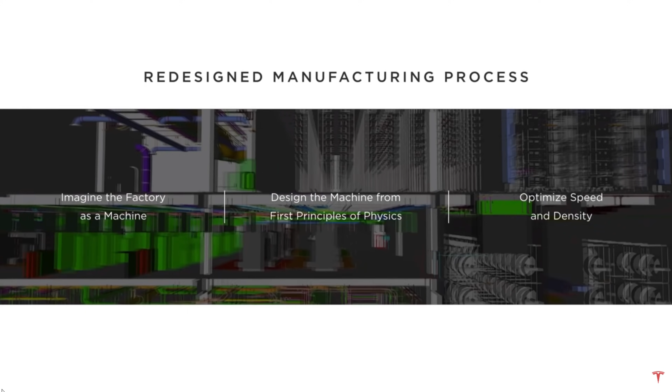Today, we'll discuss the battery production line that will help propel Tesla to 2 terawatt hours of battery production in the next 10 years.

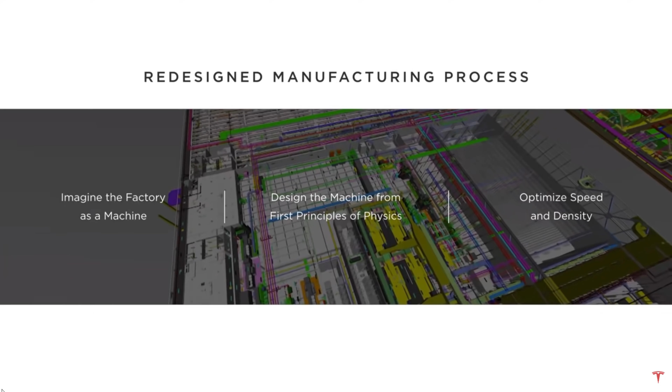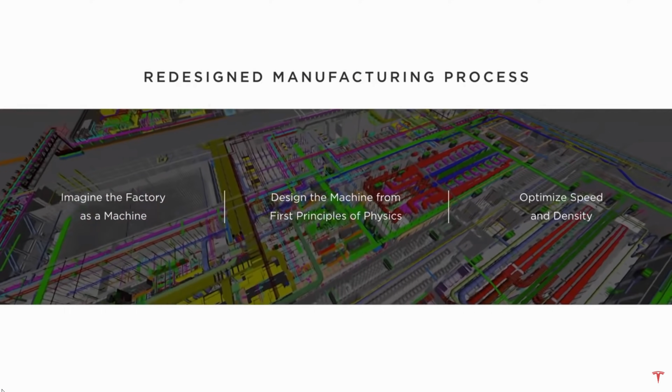To kick off, let's cover why I think 2 terawatt hours is a good target for 2030. Elon has stated that Tesla will grow by 50% a year. He's also stated that they are targeting 1 to 2 terawatt hours per year of production, but he didn't say by when. At the end of 2019, Tesla was producing and consuming batteries at an annualized rate of around 26 gigawatt hours. If Tesla grows 50% a year for the next 10 years, that puts them at 2 terawatt hours per year at year ending 2030. This gels with both of Elon's statements.

Let's put 2 terawatt hours of batteries into perspective. I've calculated a reasonable pack size for each vehicle type in the US, such as sedan, truck, and semi. I then referenced that against the market share of each of those vehicles and came up with a 90 kilowatt hour average pack size. This means that with 2 terawatt hours of battery production, Tesla could manufacture 22 million vehicles a year. That begs the question, how many vehicles are produced a year?

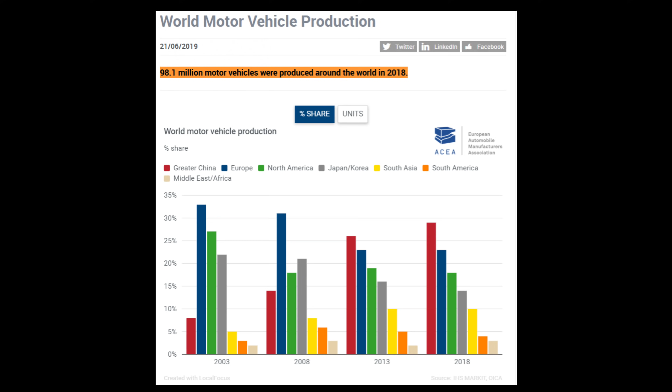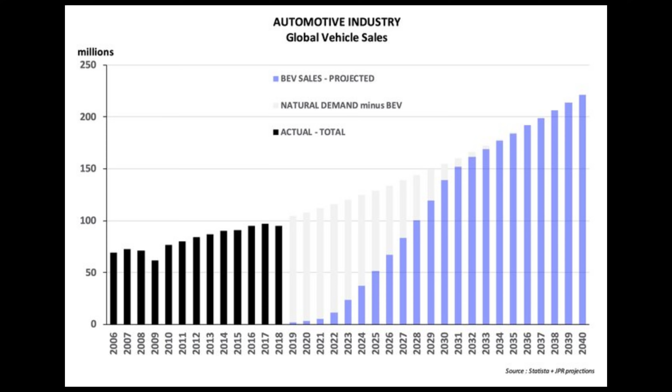There are currently 100 million vehicles produced globally each year, and that's expected to grow 2% a year throughout the 2020s. By 2030, that would mean close to 122 million vehicles a year, and based on other estimates I've seen, that could be grossly undershooting it. Using our 90 kilowatt hour average pack size from earlier, 122 million vehicles would consume 11 terawatt hours of batteries per year.

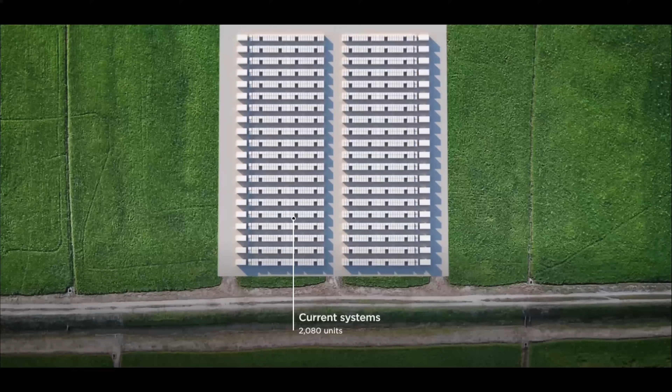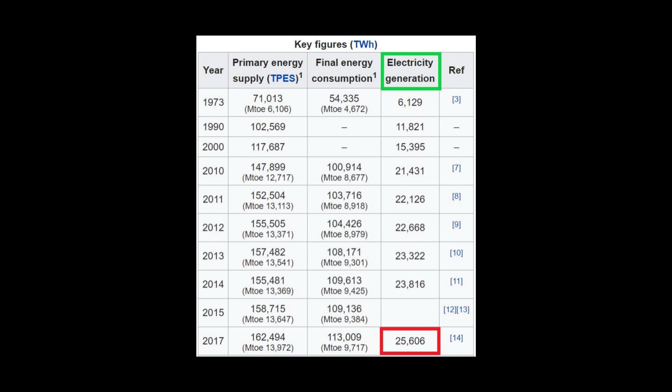However, let's take a look at potential global total addressable market. Globally, more than 25,600 terawatt hours of electricity are generated each year. By 2030, assuming a 3% growth rate each year, that would mean 35,000 terawatt hours per year.

How much energy storage backup would that need? It completely depends on the energy generation mix of each country or area. But I'd say 2 hours of storage would provide a nice buffer. I've seen other estimates up to 6 hours, but we'll play on the conservative side. That little 2-hour energy buffer for the world's 35,000 terawatt hour yearly usage would mean 8 terawatt hours of energy storage.

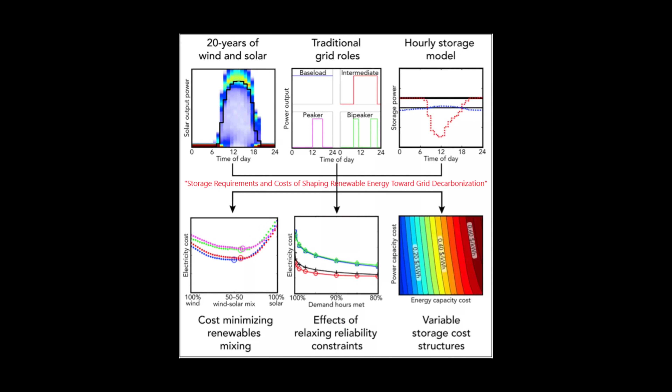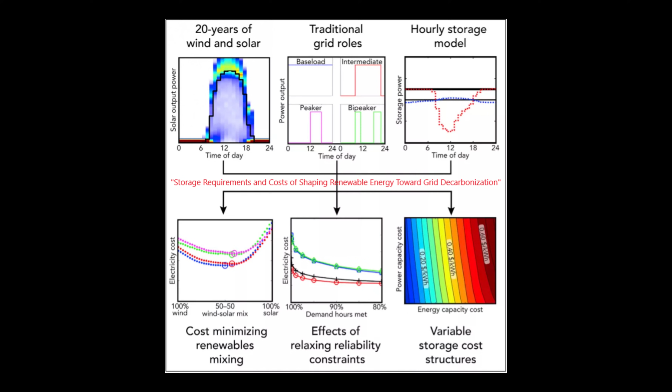That buffer would need to grow over time as the world shifts towards greater dependence on renewable energy, such as wind and solar, that produce energy supply fluctuations. This would quickly push the amount of energy storage needed past 8 terawatt hours, and this would make Tesla's energy business bigger than its electric vehicle business, just as Elon stated.

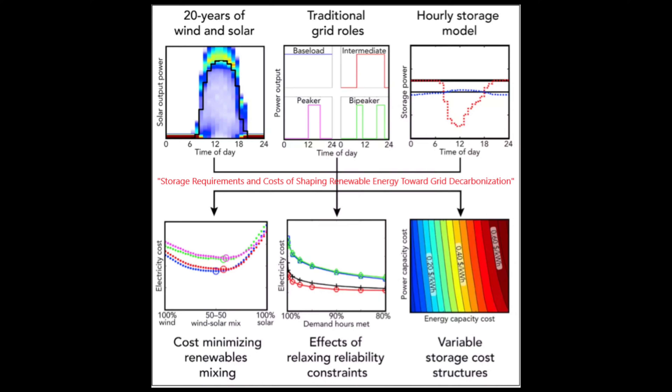If we add the 11 terawatt hours for vehicles and the 8 terawatt hours for energy storage, that would mean 19 terawatt hours of total addressable market in 2030. One of these numbers, of course, is a yearly requirement, and the other is a total requirement. However, the point remains: clearly, 2 terawatt hours is only scratching the surface.

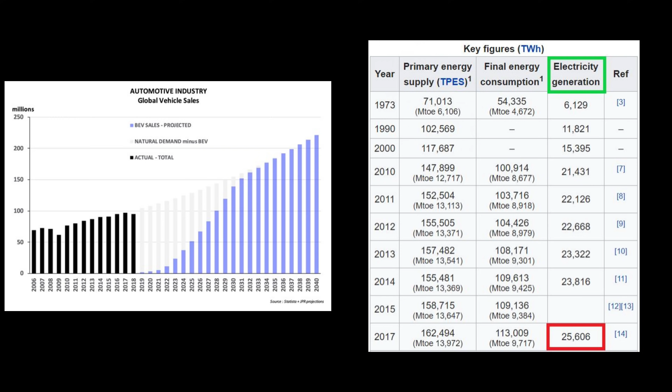Elon has stated that Tesla intends to scale rapidly and remain profitable from here forward, with few exceptions. It should be clear why. As we've seen in the last year, profitability provides a halo effect for Tesla and helps tamp down on criticism of the company. I see 2 paths that would be profitable and highly scalable: vertical integration and licensing.

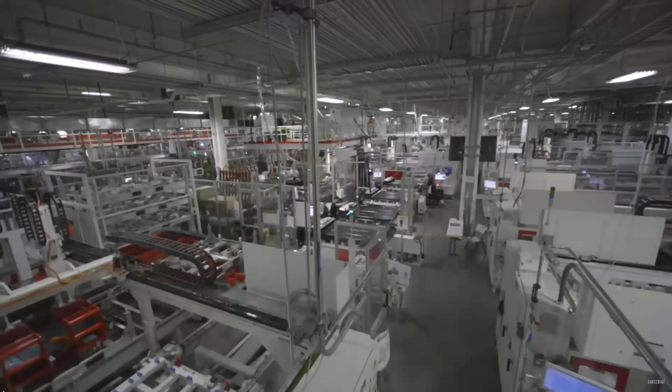Tesla is already highly vertically integrated, so that's nothing new. However, they haven't been fully vertically integrated in the most critical component of their business: Tesla has always had Panasonic as a middleman for battery manufacturing. If Tesla decided to manufacture their own batteries, it would mean bigger profit margins, a greater ability to innovate, and freedom to scale at will.

Licensing also seems like an excellent way to monetize Tesla's new battery cells rapidly and at a high profit.

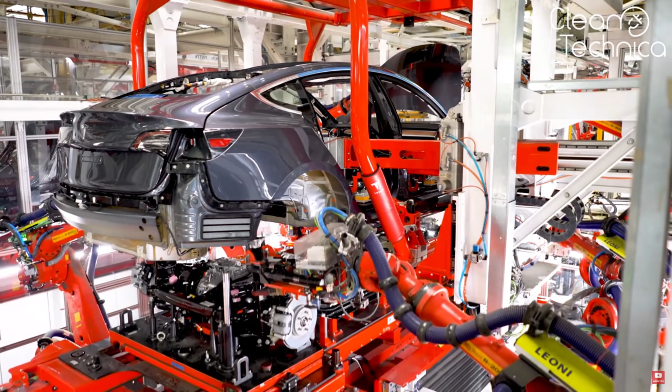However, I'm skeptical. In order for Tesla to license the technology, they need to develop their own pilot line first and work out the kinks before they could sell it as a product. Even after they've fully developed the production line, it may not make sense to send their engineers off to other companies to help implement the technology.

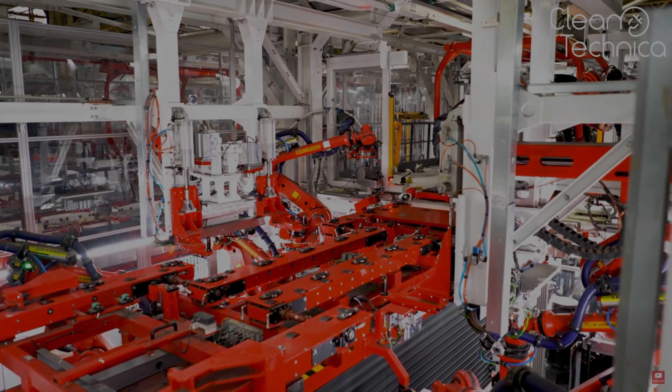One does not simply hand over a blueprint for an advanced battery manufacturing line. Tesla would need to send equipment and engineers as part of the deal. Furthermore, most other companies move much more slowly than Tesla. Why send your engineers off to companies that are slower moving? If Tesla can scale batteries faster on their own than with partners, that's what they'll do.

The exception would be if Tesla's cell lines were ridiculously productive. In other words, if they had a surplus of machinery or batteries, then it might make sense to license their production equipment or sell their surplus batteries.

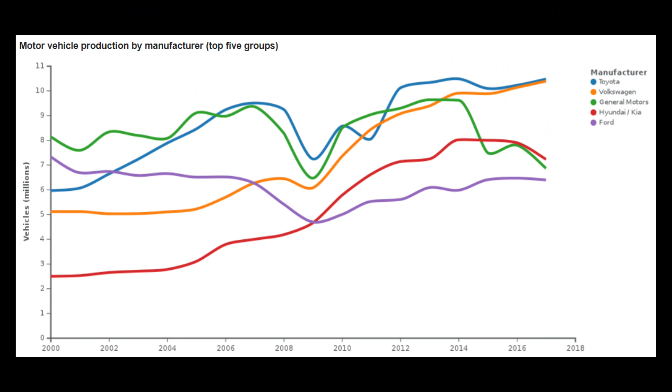With that said, I'd love to see VW and Tesla partner, regardless of whether that's for batteries or something else. VW's CEO, Dr. Herbert Diess, and Elon Musk seem to have a blossoming bromance, and the partnership would make sense. VW Group is nearly tied for first as the world's largest automaker, and Dr. Diess is keen on electrification. VW Group has some of the best engineers in the world, and Elon taps into any engineering talent that he can. Strategically, Tesla making their own battery line makes sense.

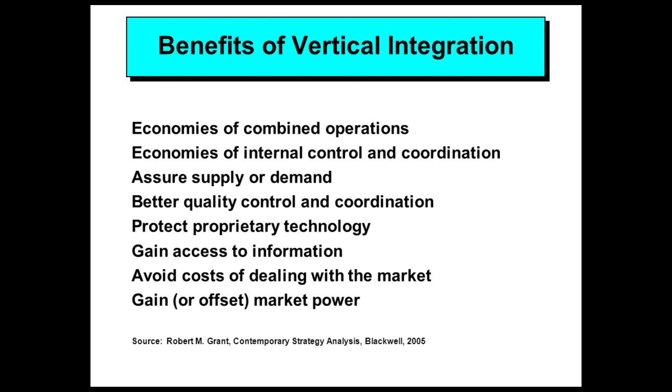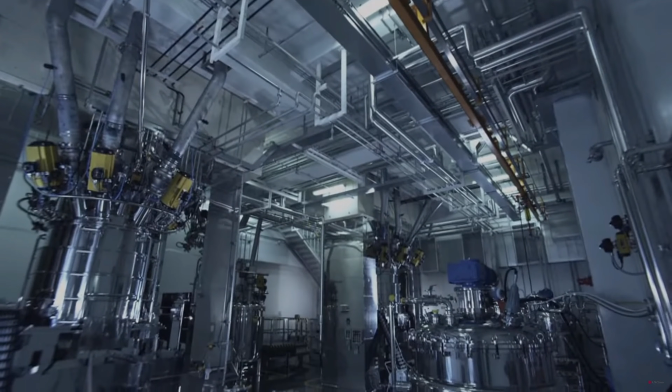However, is there any hard evidence of this? Yes, but with varying levels of credibility. These include statements by Tesla where you could read between the lines, supposed leaks by former employees, and the acquisition of Maxwell and Hibar technologies. Some would say these two purchases make it inevitable, and I tend to agree, but that doesn't make it absolute. Maxwell and Hibar cover just two parts of a much larger process.

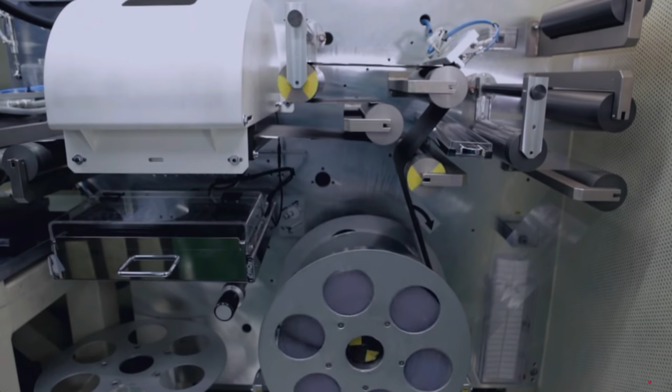These rumors are all we know for now, and it leaves us hungry for the juicy details about the actual production line and what it will be able to do. It's kind of like Christmas. Let's shake the box and see if we can work out what's inside.

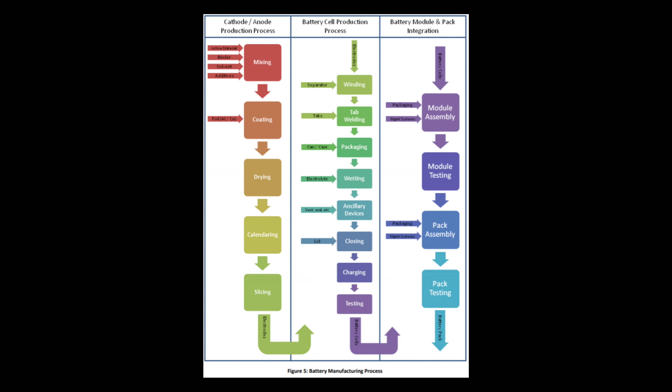To make an educated guess, we'll have to take a deeper look at what a battery manufacturing process involves. Here's a simplified diagram of what the process looks like for a typical battery production process. We'll need to walk through the diagram and understand the steps because I expect Tesla will make some big changes. Before we begin, I'd like to emphasize this is a simplified version. If you'd like an in-depth and highly detailed look, I've linked the full process in the description. This was forwarded to me by the mysterious and authoritative JPR007 from Twitter. If you aren't following him, do so.

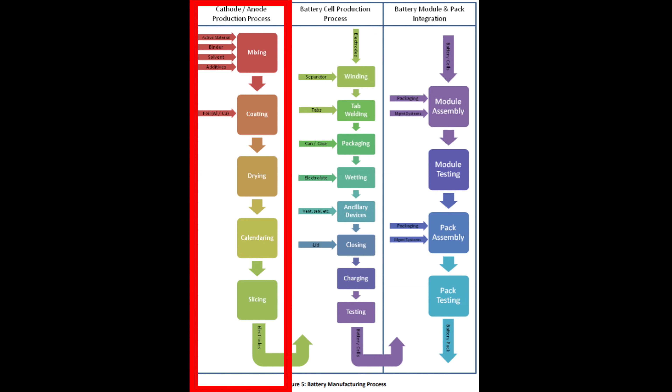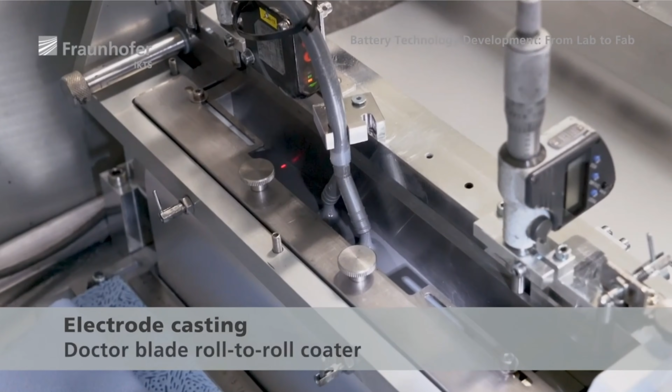Starting with the left panel, raw materials come into the factory to be mixed. This includes the active materials of the electrodes, additives, solvents, and binders. All this is mixed together to make what's called a wet slurry. The wet slurry is applied to electrode foils in a process called coating. That coating then needs to be dried because it still contains the liquid solvent.

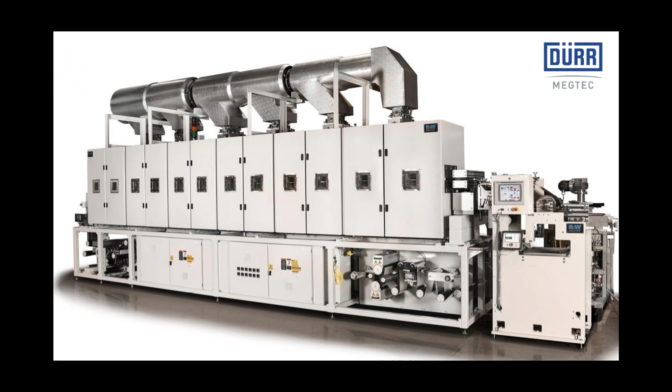That liquid solvent is a chemical called NMP, which is as toxic as chloroform and as flammable as diesel. NMP is evaporated by running the electrode foils through a vacuum oven. These vacuum ovens are absolutely massive. The lengths I found online range anywhere from 20 feet to 180 feet long. The longer the line, the better, because you can fit more product in a larger vacuum oven and increase the speed of the line.

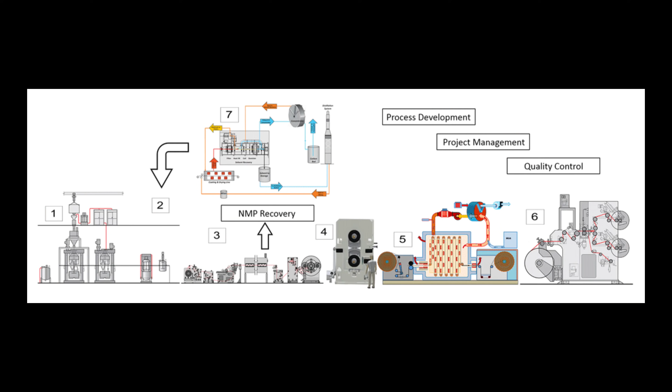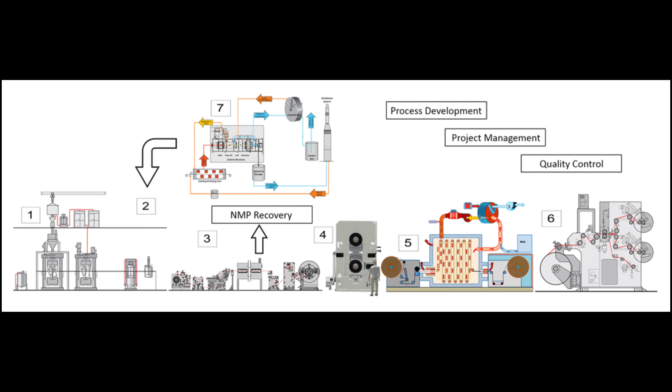Adding further complication, the NMP fumes need to be recaptured because they are too toxic to be released into the environment. All in all, NMP causes huge headaches in terms of cost, safety, floor space, and time. And as mentioned in the technical deep dive video, it has a negative effect on battery life. But it was the best we had up until now.

After drying comes calendaring, which basically means flattening and compressing the electrode material so it has the right surface shape and density. And finally, the electrode foils are sliced into the right shape, and this completes the electrode production process.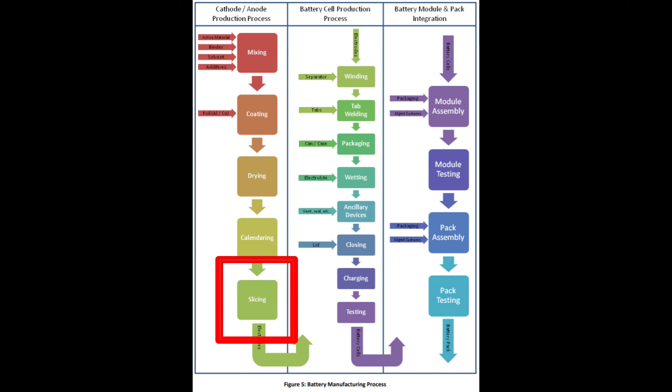Earlier, we mentioned that Tesla purchased a company called Maxwell Technologies. They have a dry electrode process that will replace this wet slurry process. Let's take a closer look. Maxwell's dry battery electrode process also starts with mixing, but there is no solvent added. The mix includes battery active materials and a binder made of carbon and polymer.

The carbon and polymer forms a bubblegum type consistency as it is squeezed through an extrusion machine. Extrusion means the material is forced through a thin but wide opening to form an extruded sheet. The sheet looks like black wax paper.

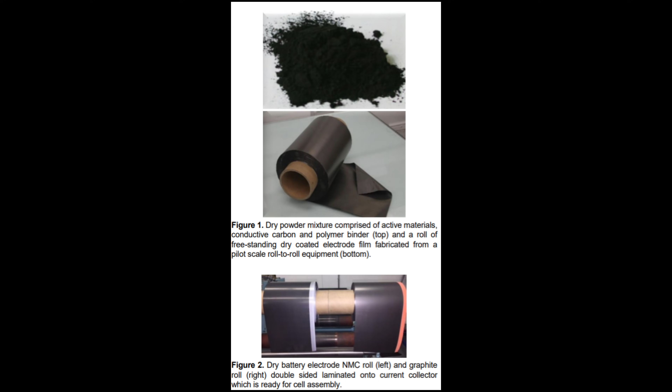Finally, that wax paper looking sheet is pressed onto the electrode foils with heated rollers. The extrusion and heated rollers also serve to calender or flatten the material, which eliminates a step. This is all done in one smooth action by one machine.

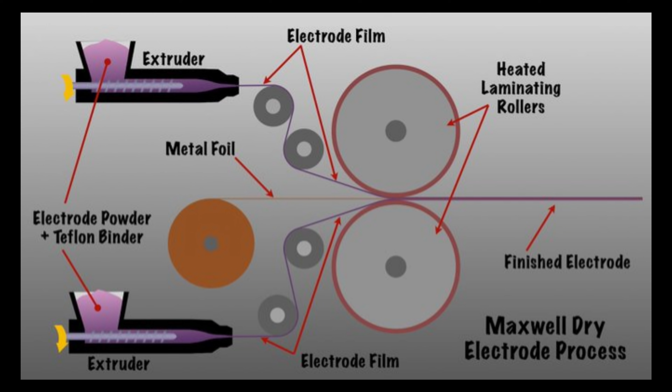This machine takes up one sixteenth the floor space of the wet slurry and drying process, something like 6 feet instead of 100 feet or more that we mentioned above. As you can imagine, the process is much faster, requires no vacuum oven the size of a small building, and requires no toxic and flammable material handling.

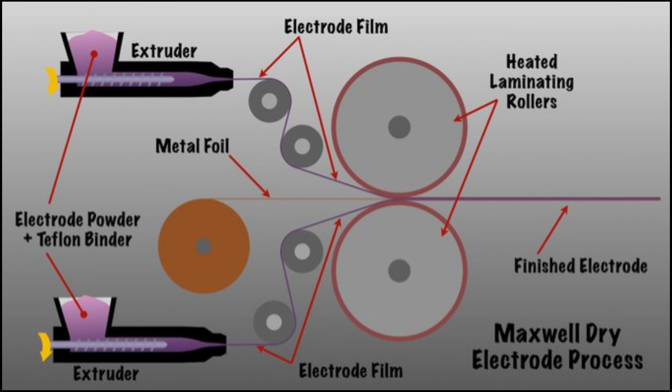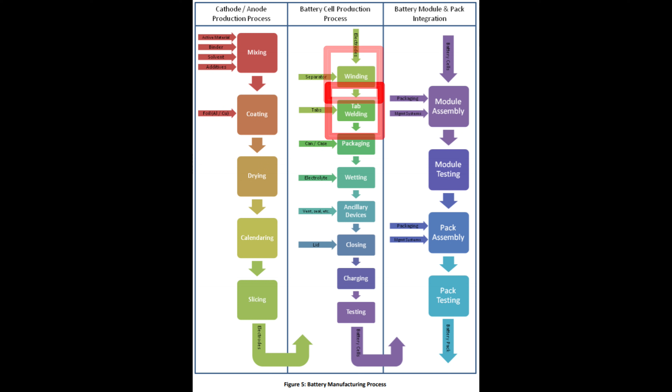The middle panel, battery cell production, starts by rolling up the electrodes we've just sliced so they can fit in the tube-shaped battery cell. Then battery terminal tabs are welded to the electrode for positive and negative connections, and the finished roll is inserted into the battery cell.

The next step is filling the battery cell with electrolyte. This sounds straightforward, but the electrode roll is tightly packed into the cell, obstructing the electrolyte from being distributed evenly. This makes filling at high speed for millions of cells difficult.

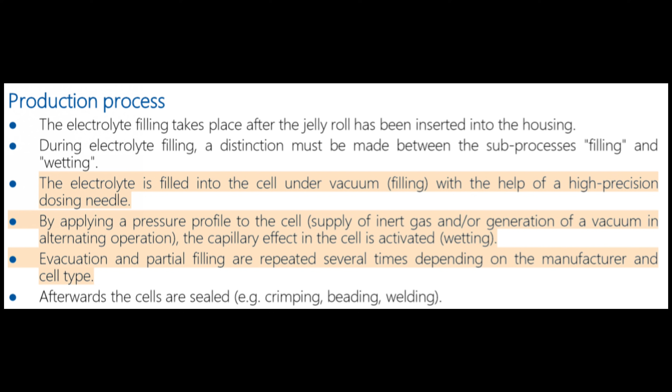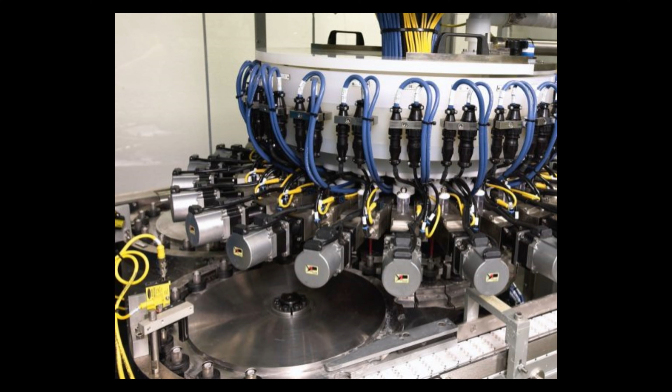Again, Tesla has made an acquisition here that not only provides them with the equipment to do the electrolyte dosing and injection, but potentially accelerates the process. That acquisition was Hibar Systems Limited, who specialize in the high-speed dosing, dispensing, and vacuum filling of electrolyte solutions into battery cells.

I think there was an underappreciation of why Tesla made this acquisition, and many people didn't understand its connection to Maxwell. Once you speed up the electrode production with Maxwell's process, the rest of the battery manufacturing line needs to speed up to keep up. Electrolyte filling was probably one of the biggest bottlenecks on the production line.

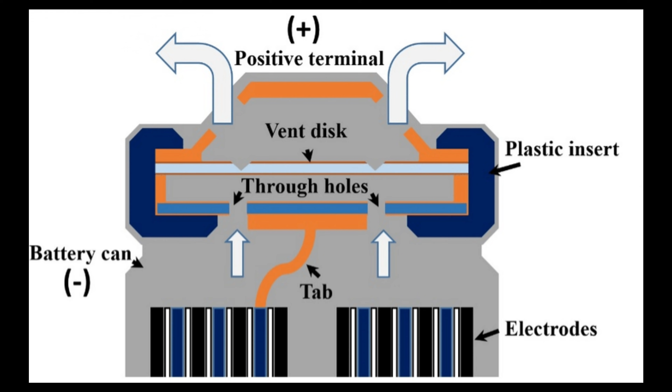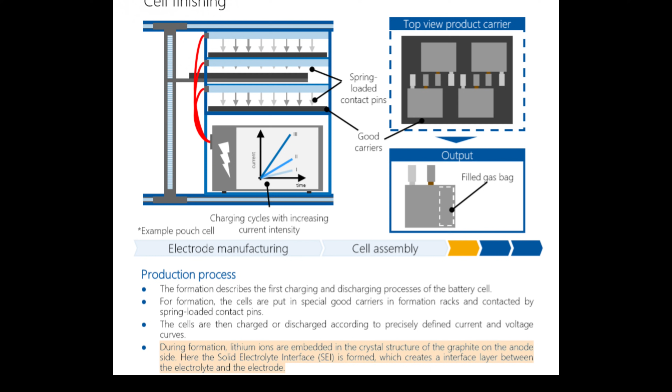Moving along, the next steps are to add a seal and a safety vent to the top of the battery, cap it off, charge it, and test it. Charging the battery creates a chemical reaction inside the battery to activate the electrolyte additives. This is called formation because the additive is forming a protective layer on the electrodes.

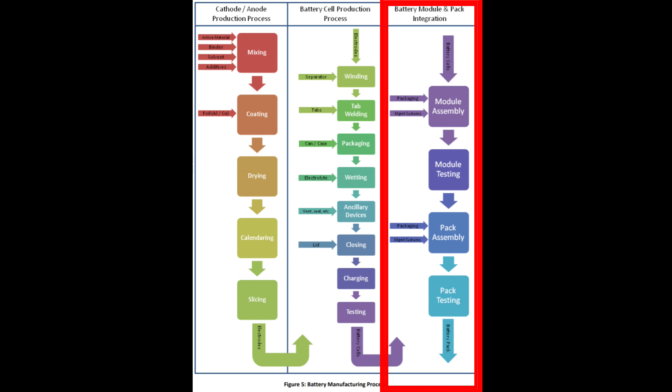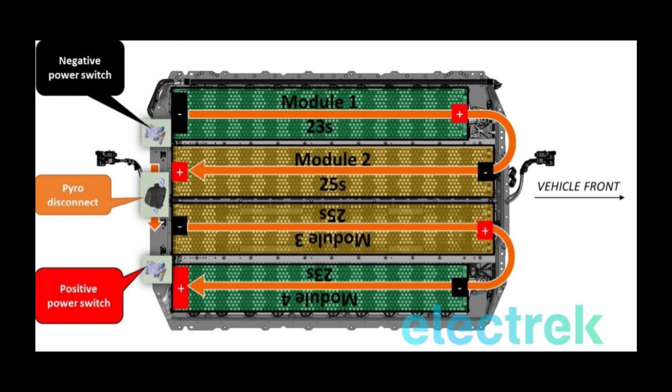Finally, the right third of this process, battery module and pack integration, Tesla is already responsible for. The first step is module assembly, where the battery cells are packed together in groups of several hundred and individually soldered to connectors.

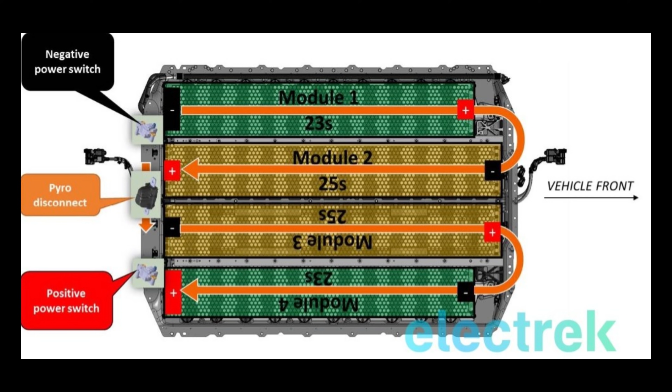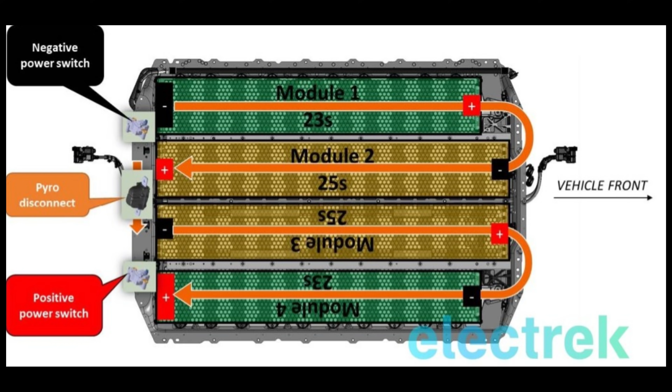The reason these modules exist is because when Tesla first started making battery packs, their manufacturing was lower quality. Because of that, they needed an easy way to remove part of the battery pack for replacement. However, Tesla has since improved their battery manufacturing and no longer needs these modules.

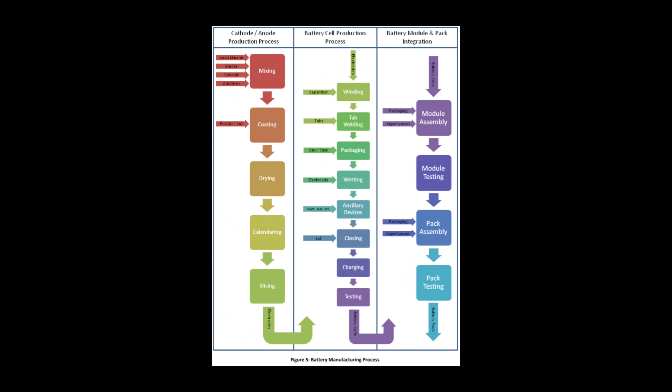The modules are then tested and joined together in the battery pack assembly, at which point the entire battery pack is tested. We now have a finished battery pack. If Tesla had control over the entire manufacturing process, what would the production process look like?

Returning to our battery chart, we can immediately cross off several of the processes thanks to Maxwell's dry electrode tech. Taking a look at the panel on the far left, there is a huge opportunity here.

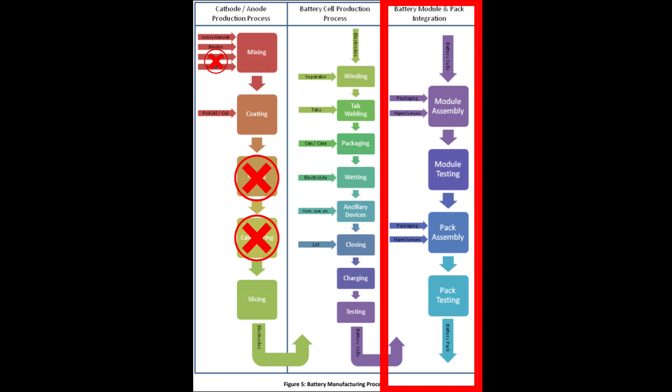Tesla could upgrade to what's called cell-to-pack technology, which is exactly what it sounds like. The battery modules are eliminated, and the cells are placed directly into the pack.

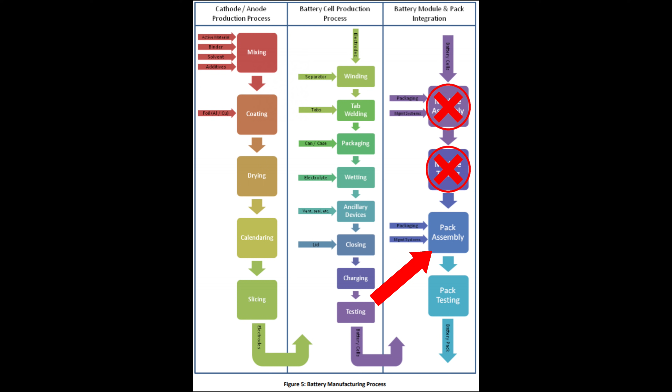In my view, there are two paths Tesla could take for cell-to-pack technology. First, Tesla could continue making individual cells as they do now, and then place them directly into the pack. It's the next logical evolution to reduce excess pack weight, cost, complexity, and increase manufacturing speed. This is the low-risk, high-reward path. I'll refer to this as basic cell-to-pack.

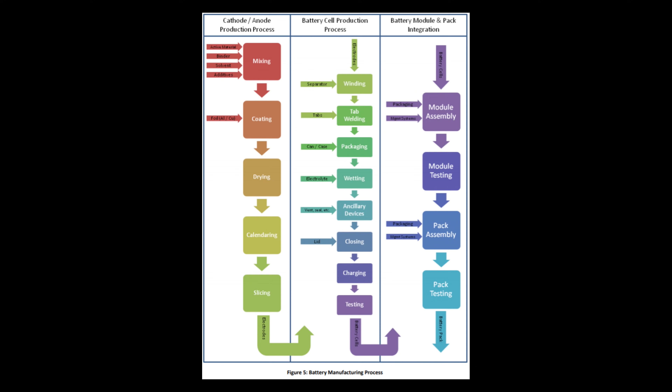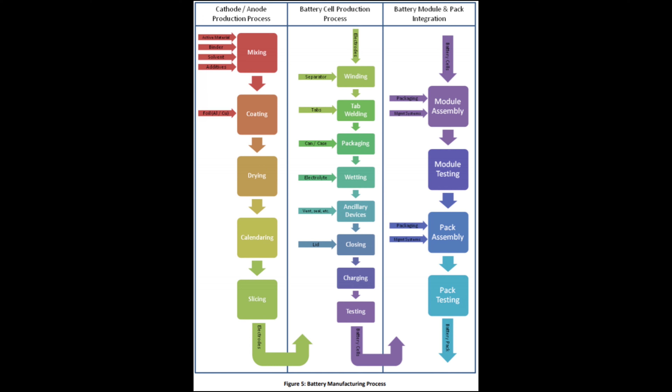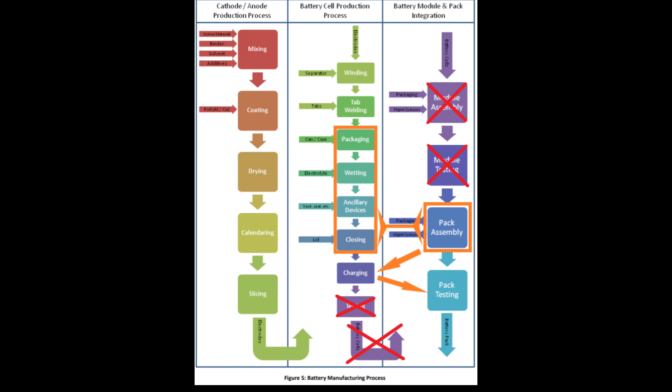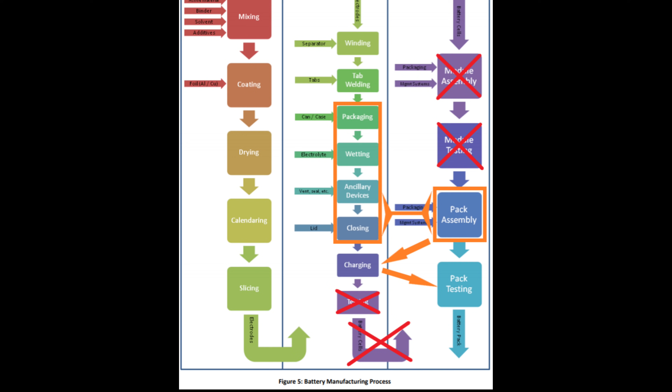The second path would be very high risk and very high reward. It would be one of the more difficult undertakings Tesla has attempted, and it might not be currently feasible. With the entire production process in their hands, Tesla could fuse together the battery cell production with battery module and pack integration. This would involve a complete redesign of the battery pack itself and a complete rethinking of how battery packs are manufactured. This path would greatly increase margins once scaled and would future-proof the company against competition. I'll refer to this as advanced cell-to-pack.

As Elon has stated many times, the pace of innovation is Tesla's moat.

Layering Maxwell tech with advanced cell-to-pack would provide one hell of a moat. Let's dive in and take a deeper look.

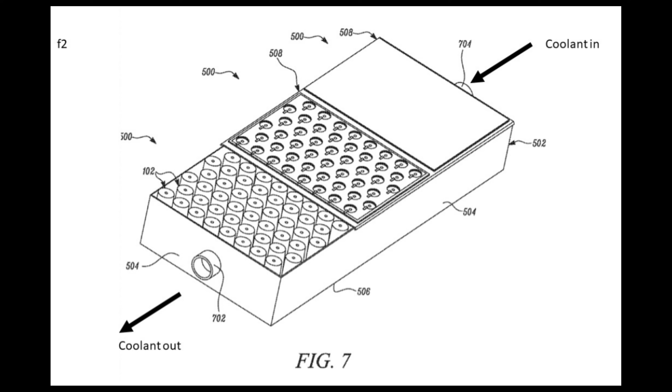Last year, Tesla registered a patent for advanced cell-to-pack technology. Instead of individual battery cells, there would be plates with the battery cells already welded in place. The electrode would be rolled and inserted, electrolyte filled, and the battery topped off with a lid that has venting, wiring, and capping built in.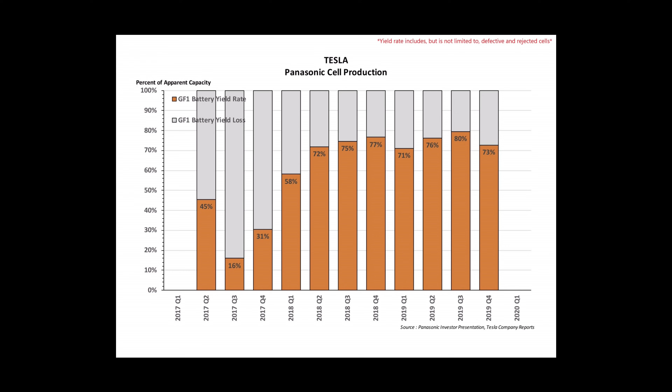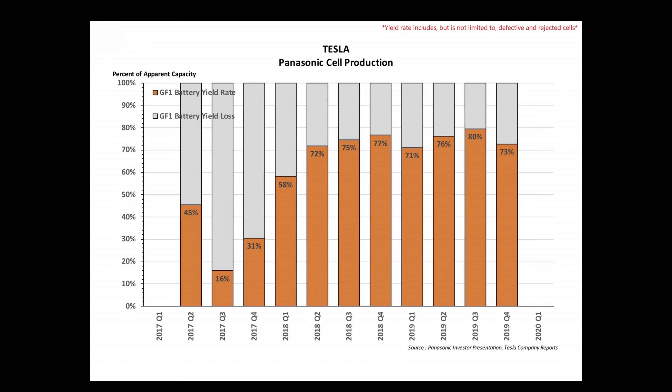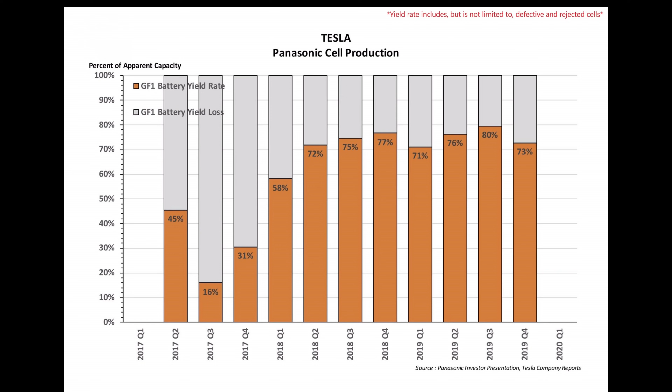In order for this to work, Tesla's battery production line would need an extremely low defect rate. Defect and yield rates were covered in the last video. For the purposes of this video, we only need to know that there is a defect rate, and it's probably in the 10% range. Unless Tesla was able to eliminate defective cells, some of these defective cells would get into the pack using an advanced cell-to-pack design.

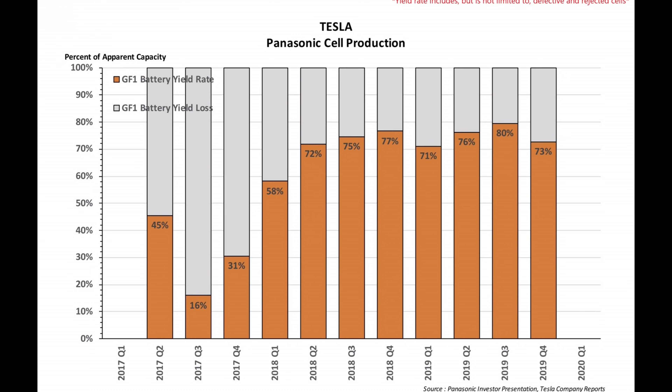However, there are 3 ways Tesla could deal with these defective cells. First, they could put extra cells in to accommodate for the defect rate. If all the cells turned out to work in a pack, they could computer limit the pack to make sure that every customer is getting the same experience.

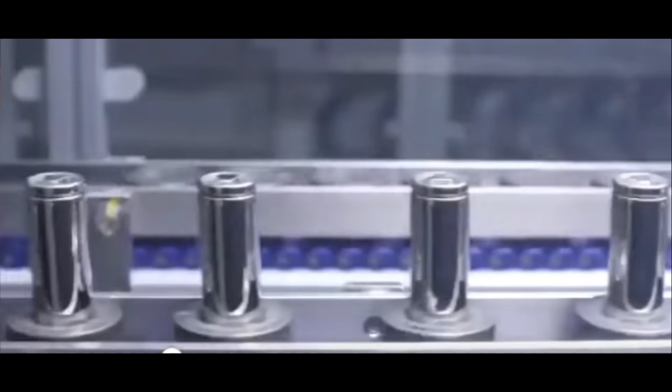Second, they could use higher yield packs in longer range vehicles. The microprocessor industry does something similar with microchips. Microchips come out of the factory with defects, and the ones with less defects go into higher performance products.

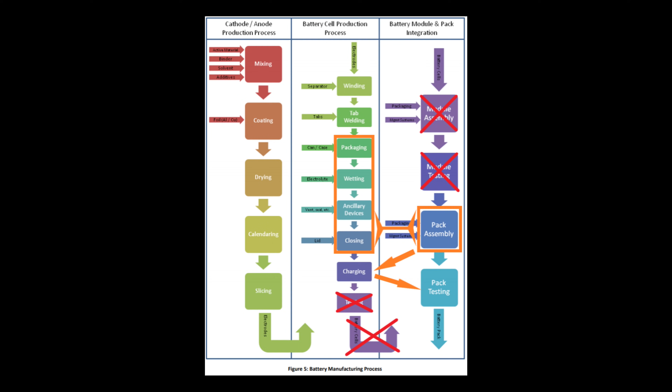Finally, Tesla might be able to increase the yield rate significantly. The more complex the process, the more chances there are for defects. As we see here, after removing and combining steps from the original diagram, roughly 30% of the steps have been eliminated, and we are left with a much more streamlined process.

These 3 options aren't mutually exclusive and could all be implemented if Tesla took this path. The benefits of advanced cell-to-pack would be huge and could far outweigh the challenges. How much money could this save?

George Bower from InsideEVs estimated that Tesla could save up to 20% per battery pack by controlling the entire battery production process. This article is linked in the description. This estimate was based on solid evidence except for a 4x production rate increase, which seemed to be a gut feel estimate.

If the 4x improvement in production rate is factored out, it would be an 8% decrease at the pack level. If we take the 8% reduction at the pack level and apply it to the $105 per kilowatt-hour battery pack from my Tech Deep Dive video, that brings us to $97 per kilowatt-hour. If George Bower's 4x speed improvement is even half right and Tesla can double line speed, we'd be looking at more like a 14% decrease, or $90 per kilowatt-hour.

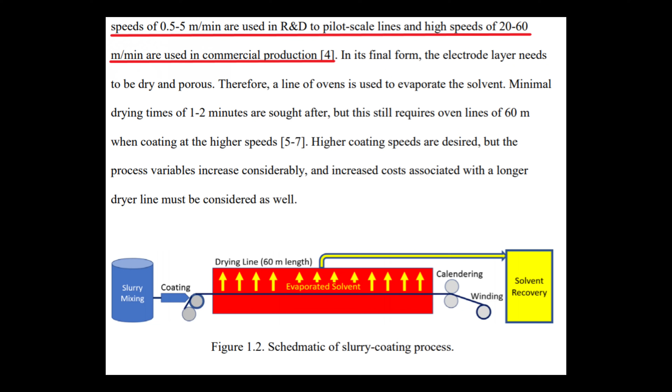What would an evidence-based production rate look like for these lines? A typical wet slurry line for pilot production or R&D is 0.5 to 5 meters per minute. A typical production wet slurry process is 20 to 60 meters per minute of output.

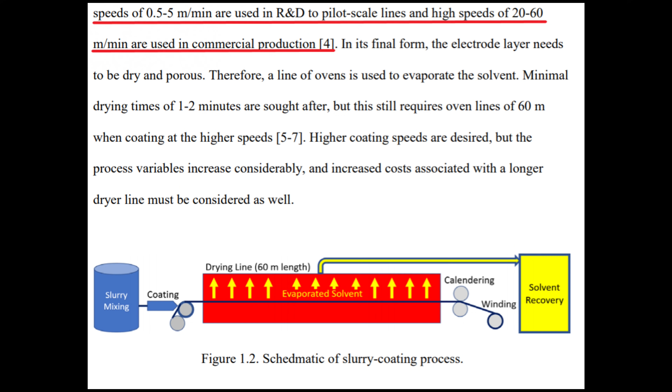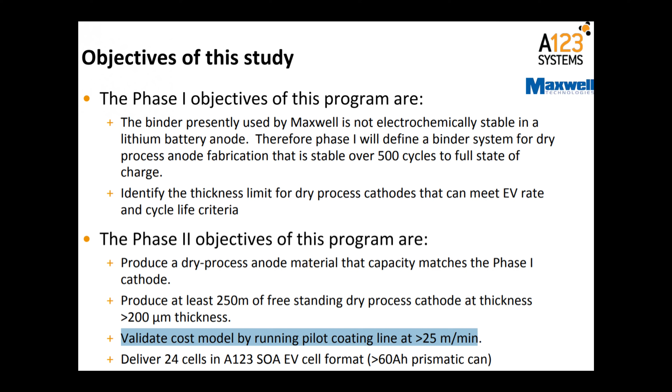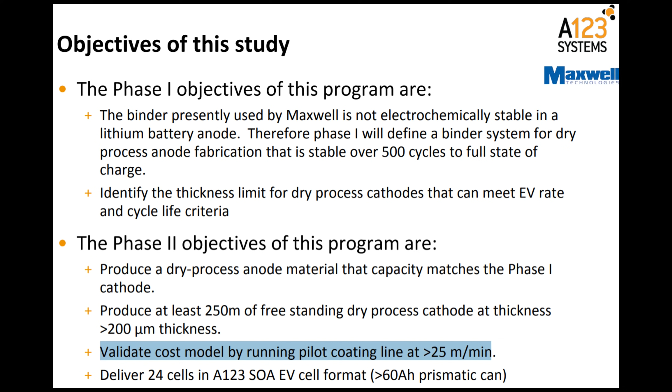I found research by Maxwell and A123 Systems that indicate a target of greater than 25 meters per minute at a pilot scale. In short, their pilot line was 5 times the speed of a typical pilot line, and nearly the same production speed as a full-scale wet slurry production system. George Bower's 4x estimate mentioned above is looking quite doable now.

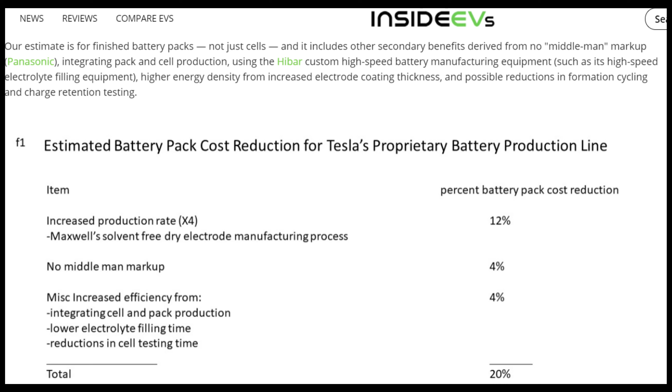I'm going to target a much lower estimate of 50% increase rather than 400%, because this will be Tesla's first battery production line. How many gigawatt hours could a line like this crank out?

Tesla currently has 13 lines at Giga Nevada with a nameplate capacity of 35 gigawatt hours per year. This means each line is capable of producing 2.69 gigawatt hours per year.

Elon advised in 2018 that he expects a 30 to 40% increase in specific energy at the cell level in the next 2 to 3 years. Let's go with 30% to be conservative. With the same number of cells produced, that would put Tesla at 3.5 gigawatt hours per line per year.

As above, if we assume a 50% production rate increase over wet slurry, Tesla would end up with 5.25 gigawatt hours per year per line.

If Tesla could produce 5.25 gigawatt-hours with a new production line, what could they do with those batteries? We know the super high-performance Plaid Model S is coming later this year. The lap times it's achieved on the Nürburgring hint at some pretty spectacular new tech. It's a family sedan, and it was beating Porsche and Corvette lap times on one of the most difficult racetracks in the world. If Tesla offered a Plaid Model S, I'd assume they'd also offer a Plaid Model X, because the vehicles use the same battery packs.

By that same logic, we could also assume the non-performance Model S and X would eventually get the new battery pack, albeit with fewer battery cells. Even though the technology in the S and X is far ahead of the competition, it seems like old technology compared to the Model 3 and Model Y. This is probably why both vehicles experienced waning demand last year.

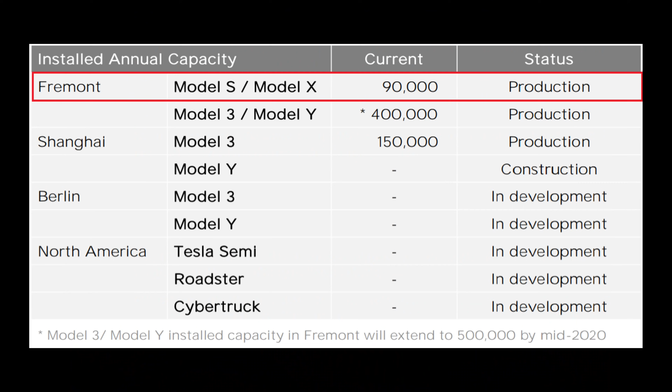The Model S and X are produced off the same line at the Fremont, California factory. The total production rate that line is capable of is 90,000 vehicles per year. Let's assume at least half the vehicles would be Plaid. That's a run rate of 45,000 Plaid vehicles per year.

I expect the pack size would also be a bit larger than the current 100 kilowatt-hour battery. If the pack size were 110 kilowatt-hours per vehicle, this would require nearly 5 gigawatt-hours of batteries per year. This would easily be covered by the 5.25 gigawatt-hour pilot battery production line, leaving us with 0.25 gigawatt-hours to spare—that's 250 megawatt-hours.

Tesla Semi is slated to begin production later this year at low volume. The battery in that vehicle is expected to be 1 megawatt-hour. Those spare 250 megawatt-hours could be used to produce 250 Semis.

I expect when the first battery production line is finished, Tesla will already be building an improved version 2 manufacturing line. The batteries from this line would then be used to move the standard range Model X and S to the new pack and continue to ramp the Semi. The next lines in 2021 could then be used for Roadster and Cybertruck in any number of combinations.

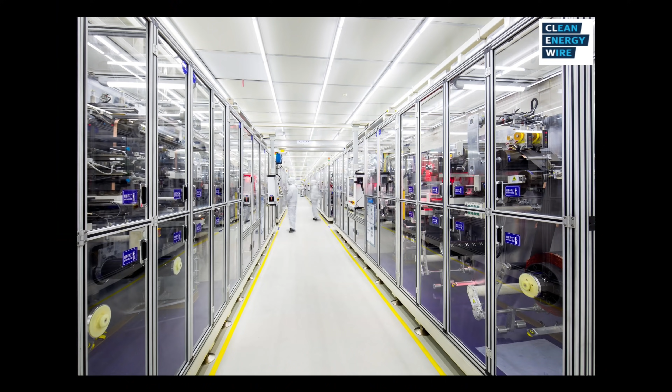These are all, of course, just educated guesses. What actually matters is the ability to scale, and I have no doubts about Tesla's ability to scale once they've built the first line. As Elon has said in the past, Tesla's ultimate product is their manufacturing ability. I think we should take this statement literally—this manufacturing line will be a product. If a factory is a machine that builds a machine, Tesla is building the machine that builds the machine that builds the machine. In other words, Tesla will mass produce these battery lines.

The biggest limiting factor I expect Tesla to run into is having enough great engineers. This sounds minor, but it's a huge issue. Giga Nevada was having difficulty scaling last year because Panasonic couldn't find enough engineers—they ended up recruiting engineers from other fields and training them. This is why you see Elon Musk constantly beating the drum for people to work at his companies and running special events to find the right people. There just aren't enough engineers out there, let alone great engineers.

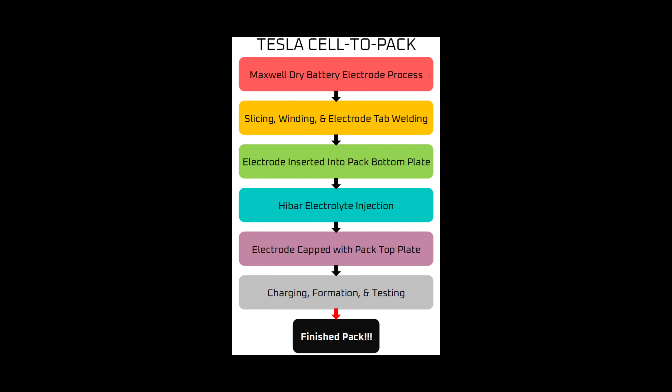In summary, Tesla's mission statement is to accelerate the world's transition to sustainable energy. My best guess is that at Battery Investor Day, Elon Musk will unveil the machine that will make that mission a reality—that is, a greatly simplified battery production system designed for rapid replication that will produce a new generation of low-cost, high-density battery packs. This is how Tesla will get to 2 terawatt-hours of battery production a year by 2030, and potentially more if Tesla continues expanding its partnership with Panasonic or establishes new partnerships.